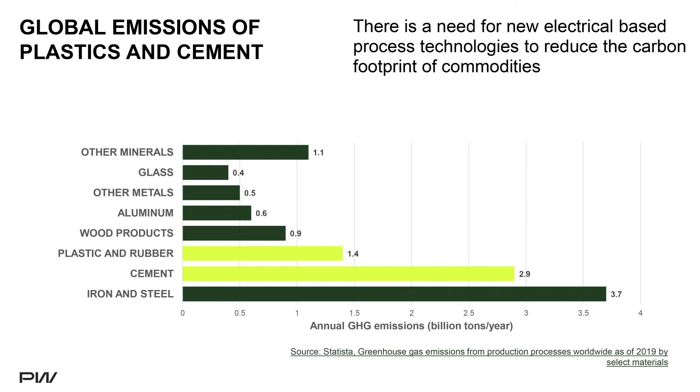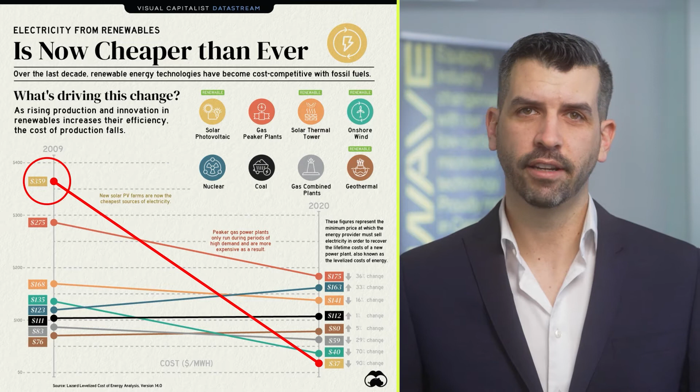The production of basic commodities like steel, cement, and plastic represents the top 3 largest greenhouse gas emitters. This is mainly because most of these commodities are produced by processes that run on thermal energy. In parallel, lots of progress was made in the renewable energy sector in the past 10 years. Costs for renewables decreased sharply and are now becoming cheaper than conventional carbon-intensive energy sources. It is therefore a subject of interest to see how we can use renewable electricity for production of commodities.

Electrification of commodities requires new sets of technologies that can use renewable energy as a primary source of energy. It is also an opportunity to see how we can better use these energy sources to unlock additional benefits. In the present days, we see a lot of companies proposing aggressive plans to electrify their processes. We see things like electrifying cracker, steam reforming, drying, evaporation, and distillation. While it may sound like a good start, I think that's not enough, and I believe we can do more to unlock the whole potential of electricity in commodity production.

Lately, many companies approach electrification by switching fuel heaters to electrical heaters. This is an easy way to use electricity without changing the process too much. This approach is a little bit like turning a steam train powered by a coal boiler into a steam train powered by an electrical boiler. It will certainly have less emissions, but any modern eye will see that doing that is not wise. It certainly works at moving the train, but at least 2/3 of the electrical energy will be wasted as heat instead of moving the train.

What we do at Pyrowave is the exact opposite of what the polymer industry did for the past 50 years. Polymers are assemblies of monomers attached together. Think of little Lego bricks that are snapped together to form larger assemblies. The bricks are monomers and the assemblies are polymers. So basically, for more than 50 years, the industry focused on assembling these little monomer bricks. Nowadays, our primary interest is disassembling these bricks perfectly without damaging them too much.

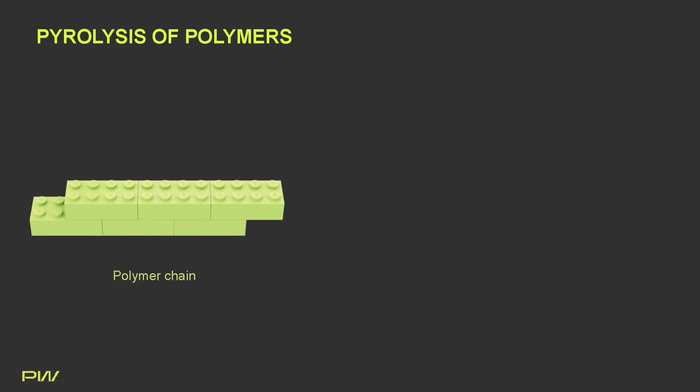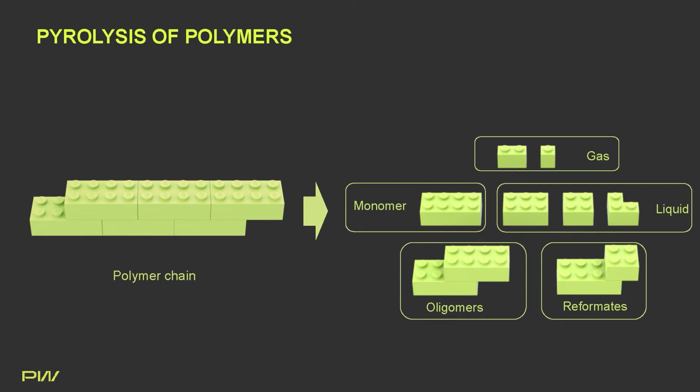Thermal degradation of polymers is one way of breaking down the polymers into monomers. However, several technologies will have various disassembling accuracy, and the process may break apart some bricks into smaller elements. The process will produce the monomer of interest, smaller molecules that are still big enough to form liquid, smaller molecules that form non-condensable gas, some bigger molecules that did not break during the reaction, and finally some more molecules produced through recombination of smaller molecules together. Different technologies will produce more or less of the various components.

The principal advantage of the microwave technology is that we're able to maximize the production of monomer over other compounds. The key for achieving high selectivity of monomer is being able to have a gentle and selective unsnapping process that disconnects the bricks without breaking them. It's what microwaves do, and I will explain to you how.

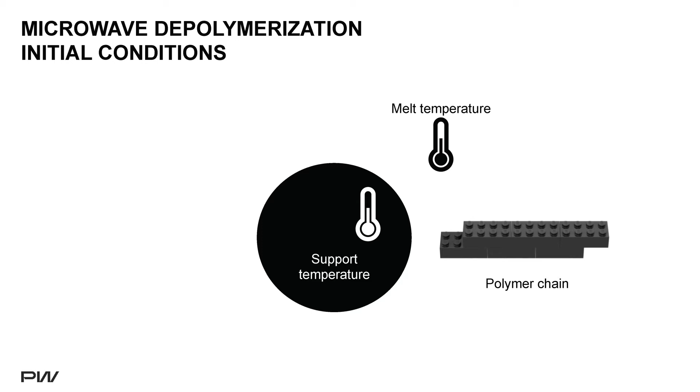Everybody who uses a microwave at home knows that plastic alone doesn't heat. In fact, only the material inside the container will interact and heat under the action of microwaves. To initiate depolymerization with microwaves, we use a specifically designed support that delivers the electrical energy to the reaction. This support must be adequately chosen to convert the electrical field into hot spots to support the reaction. To start with, the support is immersed into the molten polymer mixture where both the support and the polymer have the same temperature. Once the microwave field is applied, only the support will heat while the polymer will remain at lower temperature.

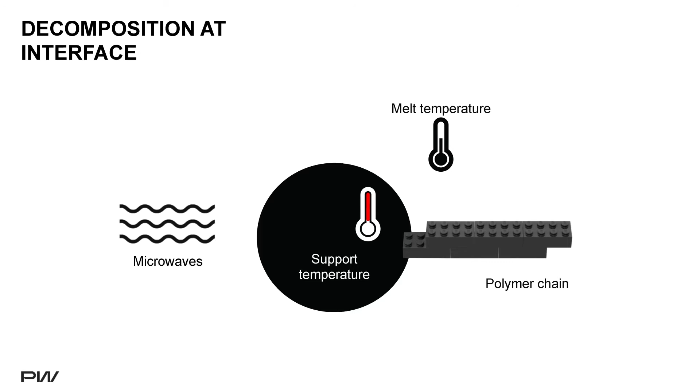Then, when the polymer chain touches the support, the first brick touching the support will be chopped off instantly. This is called a chain-end scission mechanism. This mechanism is gentle and favors production of monomer.

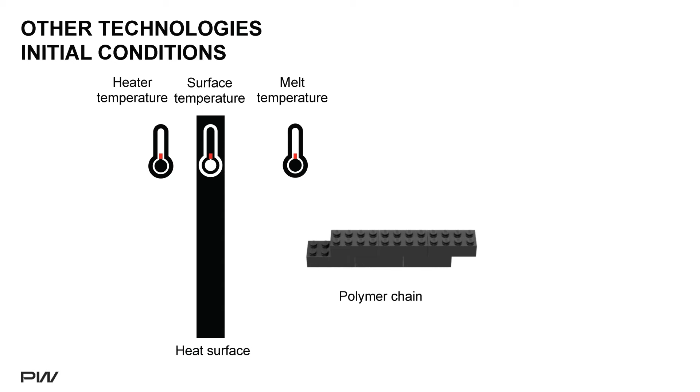When we look at conventional pyrolysis processes, the heat is normally transferred by a surface heated by a media on the other side. When the heat source is powered on, the surface temperature increases and the heat flows into the polymer melt. The molecules then increase in temperature, and vibration of the chain causes the chain to break.

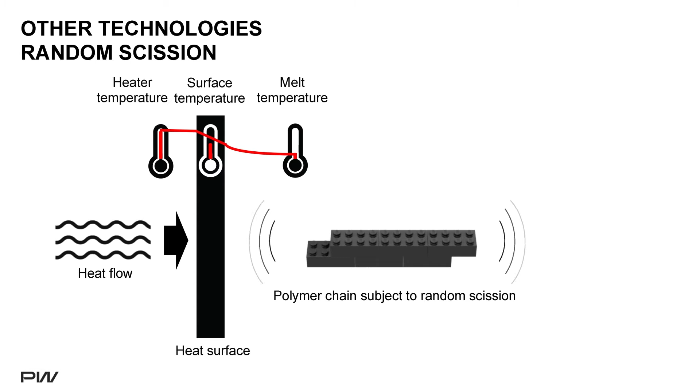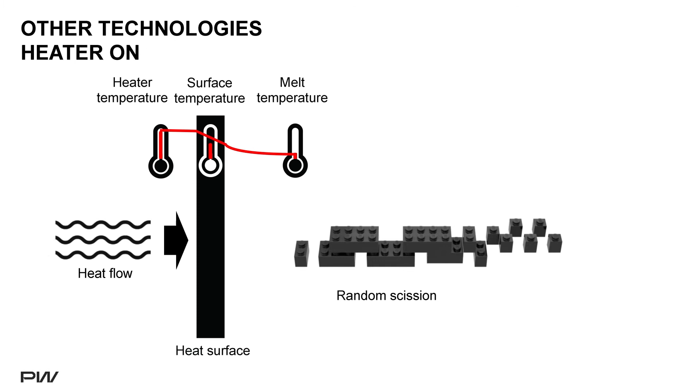Because the whole polymer chain is at high temperature, the monomer bricks are still undergoing further degradation, causing the bricks to break into smaller bricks. This has the effect of reducing the net production of monomer bricks. The mechanism involved in this case is called random scission, meaning that the chain breaks randomly along the chain into various components.

Some could ask why nobody did it before. Other people did study microwaves and chemical reactions in the past 50 years. However, most of those works were at lab scale. The difficulty until now was the ability to scale the process at industrial level.

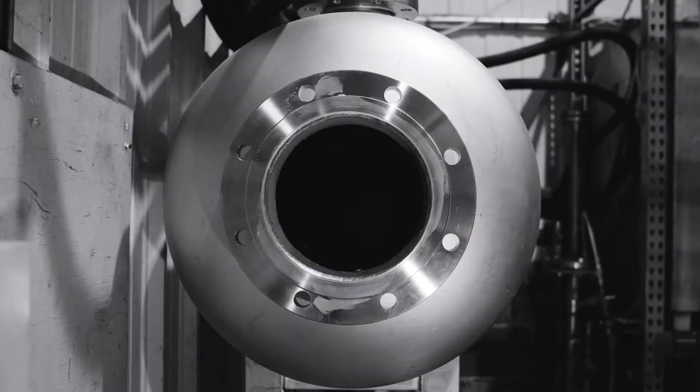Our unique patents and know-how cover a new generation of high-power microwave reactor devices. The result is not only a plastic recycling technology, but a very powerful platform that can be used to produce a variety of chemicals using microwave energy.

At Pyrowave, we have a proprietary technology, so we can operate through licensing and as original equipment manufacturer. This means we are selling the equipment modules comprising the proprietary reactor, alongside the process book that basically gives the recipe on how to operate and integrate the technology. This is possible only because we have a true proprietary technology.

Our initial focus is working with other change makers with strong sustainability targets who want traceable drop-in replacement solutions for their virgin commodities. We primarily focus on companies consuming styrene for production of styrenics like GPPS, ABS, SBR, and EPS.

We are currently signing pre-licensing agreements with potential clients all over the world. These agreements provide access to licensing terms as well as the industrial level engineering package that has been developed jointly with Pyrowave and our partner Michelin.

One of the key components for circular economy is understanding the value chain. While mechanical recycling has been around for more than 50 years, only 10% of the incoming plastic can be returned into virgin-like applications. While mechanical recycling techniques may not be good enough to return all the plastics into virgin applications, they are certainly good enough to make them ready for further treatment like chemical recycling.

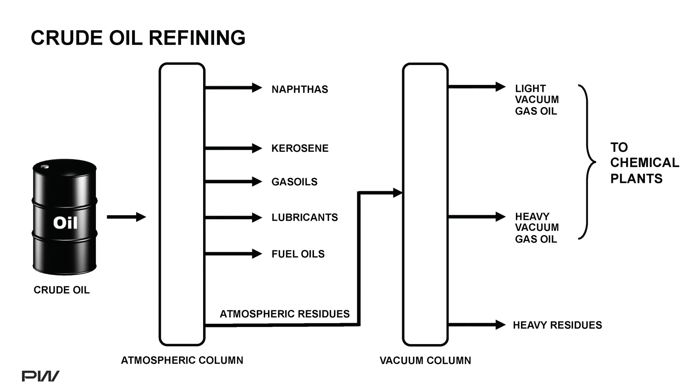After this additional separation step, the various products have a quality acceptable for downstream chemical processing and eventually become plastics and chemicals. By analogy, plastic bales are separated mechanically in a plastic recycling plant to extract valuable products like polymers with market value as is.

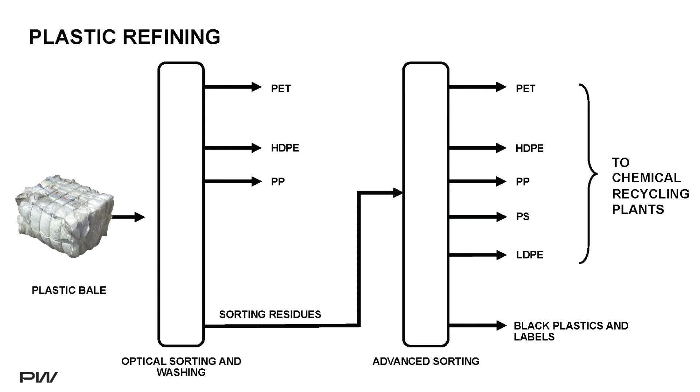However, the sorting residues can be reprocessed through more advanced sorting equipment to extract the remaining polymers. These will have lower quality, unacceptable for market use, but acceptable for downstream chemical processing. So for me, mechanical recycling is like a refining step in a petrochemical plant. It is certainly needed to maintain quality. It is still the best way to prepare the feedstock to match the quality input of most chemical recycling technologies and extract the maximum value from incoming feedstock.

Pyrowave is increasing its presence in Europe for circular economy of plastics. We are starting our commercial activities in Europe with Michelin being our first client. In November 2020, Pyrowave and Michelin announced a joint development project for industrialization of the Pyrowave technology and established new value chains in the circular economy of plastics.

Michelin has strong ambitions to turn 100% sustainable by 2050, and as such, sourcing renewable styrene monomer for the production of synthetic elastomer is strategic. With our technology, Michelin will be able to produce renewable styrene from polystyrene waste and integrate renewable content into their synthetic elastomers. Since the successful collaboration started, Pyrowave joined Chemical Recycling Europe, and Michelin joined the Polystyrene Recycling PS25 Consortium.

The engineering of the project is now complete, and we have been signing pre-licensing agreements with clients all over the world. We are looking for additional clients looking for renewable styrene solutions with our innovative proprietary technology.